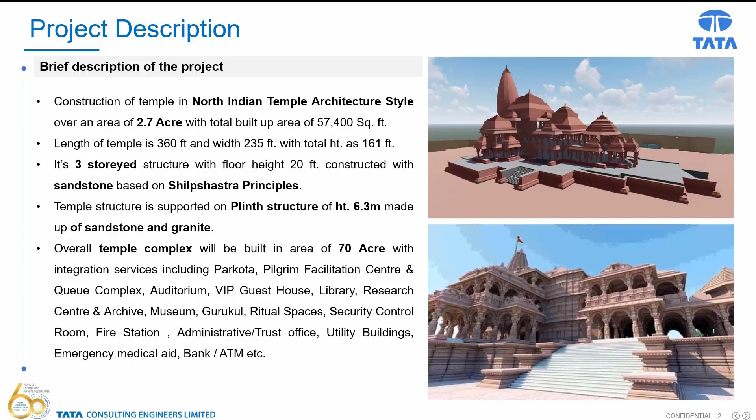The ancillary structures in the complex include pilgrim amenities, museums, outdoor exhibits, formal landscape gardens, priest residences, VIP guest houses for the visitors, and many more. TCE's scope in the project includes design review of foundation system and stone superstructure.

TCE is involved in procurement assistance, construction supervision, and project management consultancy for the main temple structure and Parkota constructed in an area of 6.7 acres. It is also involved in detailed planning, engineering, and design of infrastructure and the structures. The project started in the month of November 2020 and is expected to be completed by August 2024.

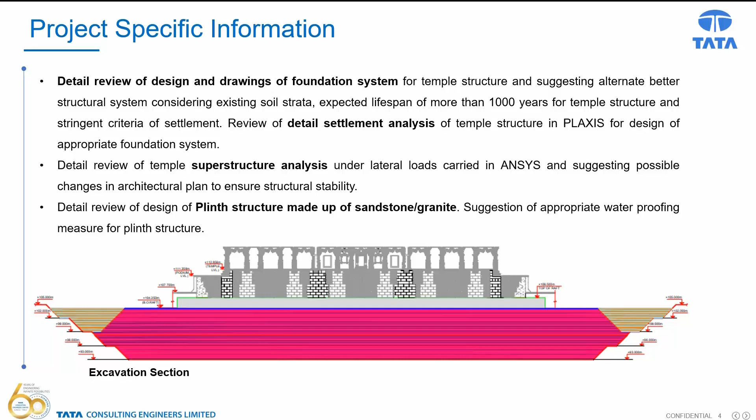Coming to project-specific information. Detailed review of proposed design to test the robustness of the temple was carried out in the following manner. Review of settlement analysis of temple structure in PLAXIS for design of appropriate foundation system. Detailed review of temple superstructure analysis under lateral loads carried out in ANSYS and suggesting possible changes in architectural plan to ensure structural stability. Review of plinth structural design and suggestion of appropriate waterproofing measures.

Detailed review of design and drawings of PCC raft resting on roller compacted concrete subbase and of Parkota structure and retaining wall. Review of infrastructure and MEP facilities. The superstructure temple design was reviewed from the drawings received by the temple architect and in turn proposing modern amenities and facilities pertaining to crowd management, public utilities, inclusive design, building services, and ensuring adherence to statutory norms and guidelines for project approval.

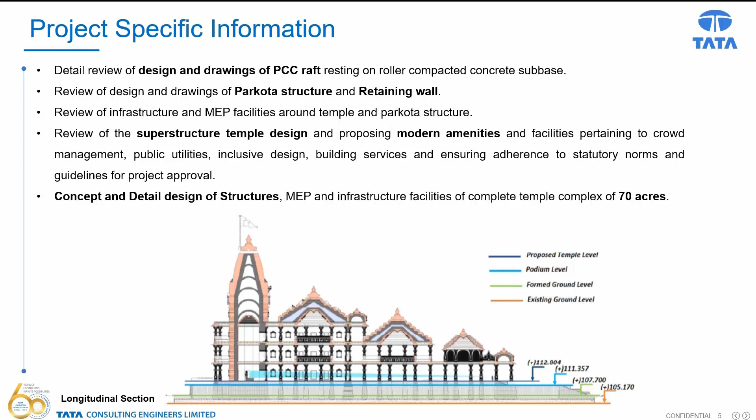Best practices and innovation. For the temple foundation system, geotechnical findings showed presence of cultural debris for a height of 8 to 11 meters. PCC piles without any reinforcement with limited lateral load carrying capacity was proposed. Shear connection between PCC diaphragm wall and PCC raft was not guaranteed. For the superstructure design, resolution of challenges in temple design was by making Shilpa Shastra temple design principles and present-day building regulations go hand in hand.

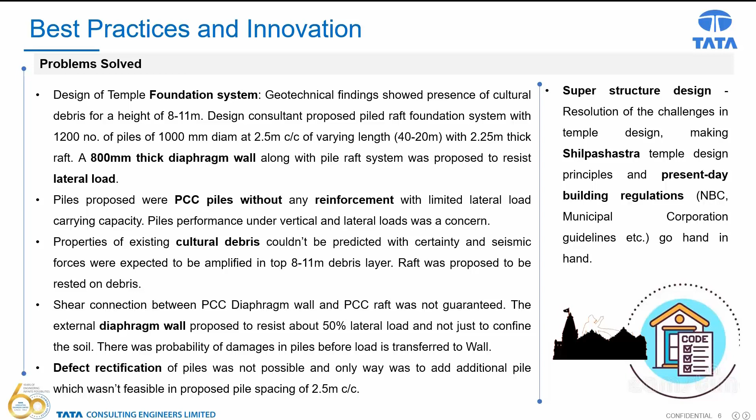Problem identification. TCE reviewed foundation design and settlement analysis carried out in PLAXIS. Lateral pile load test failed with structural failure at relatively small displacements. For the superstructure, after analyzing case studies, primary and secondary research, on-site survey and review of the architectural drawings received from the superstructure design architect, suggestions were given by TCE.

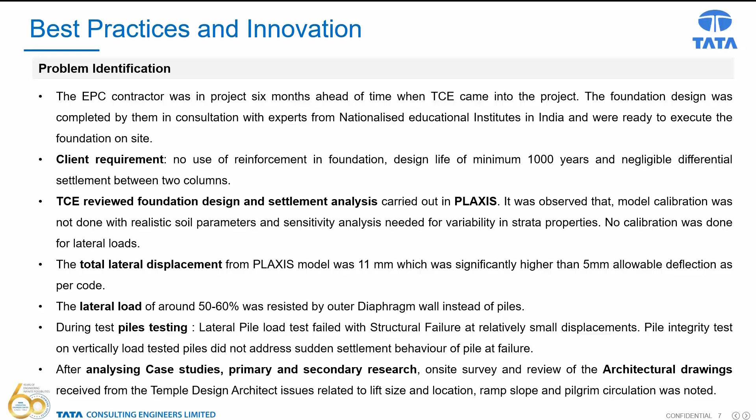Value additions. After studying the foundation systems of ancient temples in India and the on-site conditions, TCE proposed to completely excavate the existing fill and replace it with a high-quality engineered fill. Settlement analysis considering properties of RCC derived from extensive lab tests and mock-ups done on site, carried in PLAXIS, was found within prescribed limits.

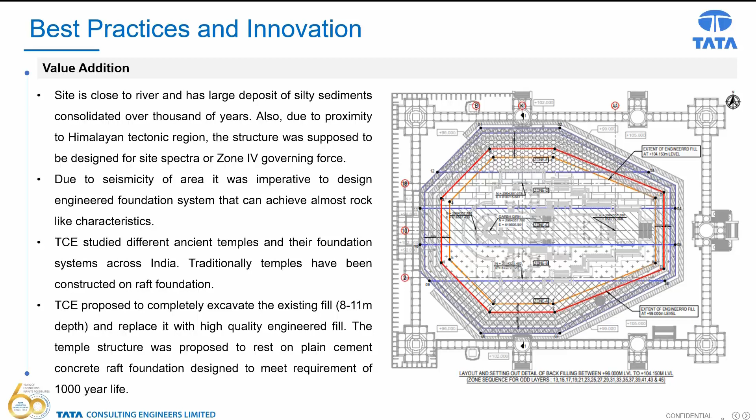TCE's suggestion of open foundation was studied and approved by 9-member expert committees of different national engineering institutes. The value additions proposed in the superstructure were standard lift sizes, ramp slope adhering to inclusive design, etc.

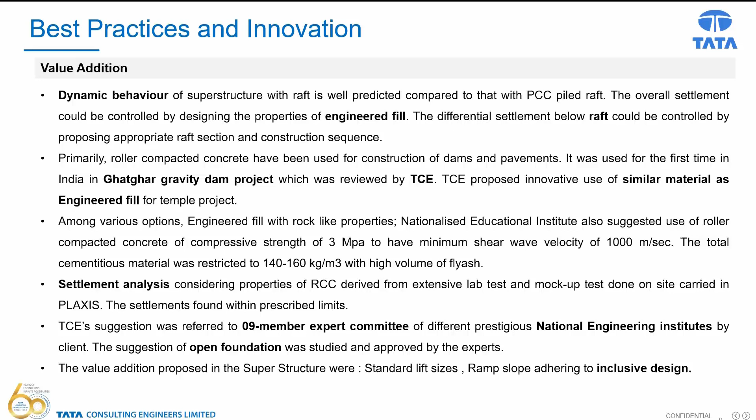The innovation suggested by TCE is the use of roller compacted concrete for a height of 12 meters as an engineered fill for a temple structure, a unique, first-time solution implemented in India and abroad. The innovative concept was adhering to present-day building regulations and abiding by the design proportions of temple design principles.